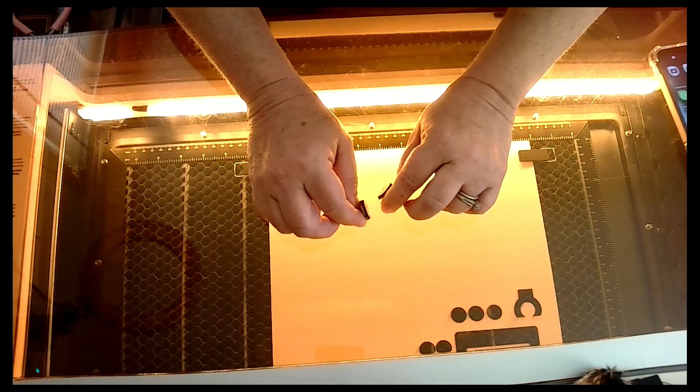Hey guys, in this video I'm going to show you how to design and create some really fun custom cufflinks for Dad for Father's Day. So we're going to be doing most all of this on the computer, so let me get to the computer

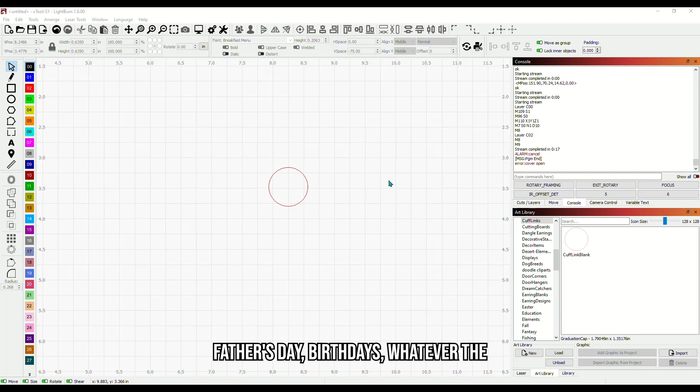and we'll get started. Okay guys, in this video we are going to be designing some fun cufflink blanks for Father's Day, birthdays, whatever the occasion. I just thought cufflinks are something a little bit different and they're super easy, so it'd be something really fun to do. All right, and I'm using LightBurn for this, and we are going to start out with a circle that is

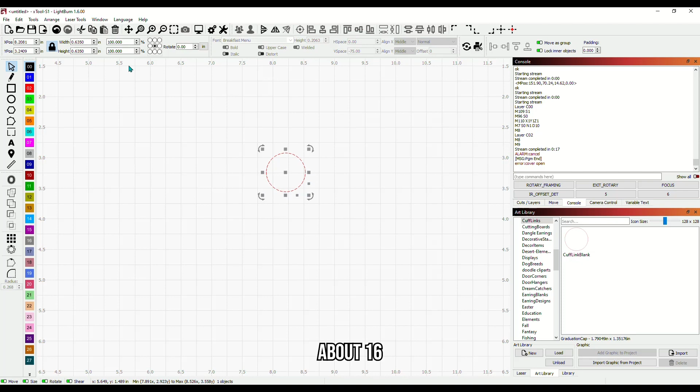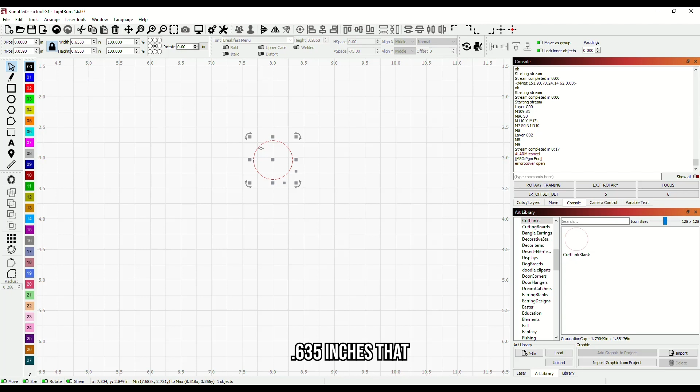0.635 inches, or about 16 millimeters, roughly, I believe it's 16.129 millimeters. I like to work in inches because that's how my brain functions, so I do inches for most things. So in this case, like I said, it's 0.635 inches. That will fit nicely in the cufflink blanks that I will link for you in the description of this video.

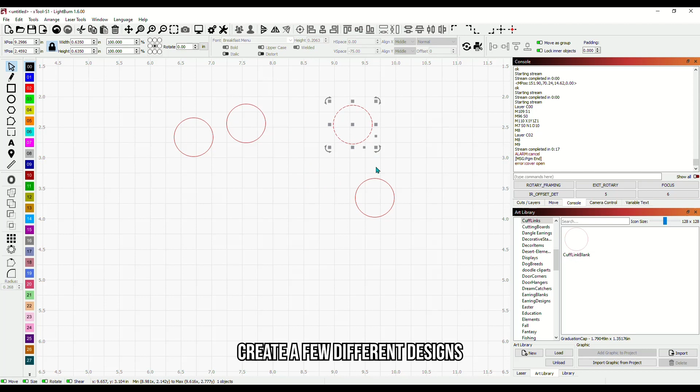Now, there's a couple different ways you can do this. You know, there's so many options. I'm going to make a couple copies of my little cufflink circle here so we can create a few different designs, and you know, you can get some ideas of what you might want to do.

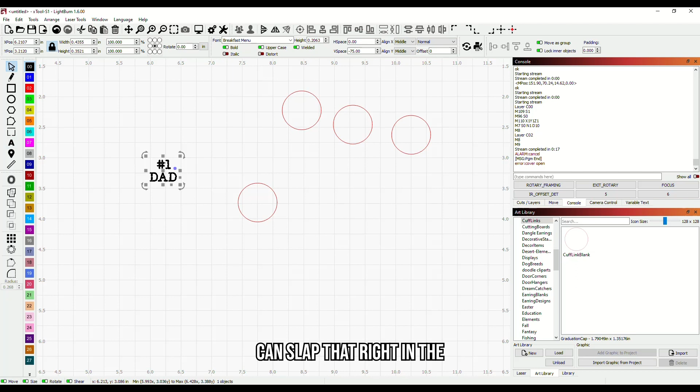Another idea is taking artwork that your child has done and tracing that and engraving that onto a cufflink. So I'm looking through here. This is my grandson's folder. He likes to draw some really odd, apparently it's from a game or something, I'm not sure, but he likes to draw these characters. So I am just going to take this little eel thing here that he drew, and

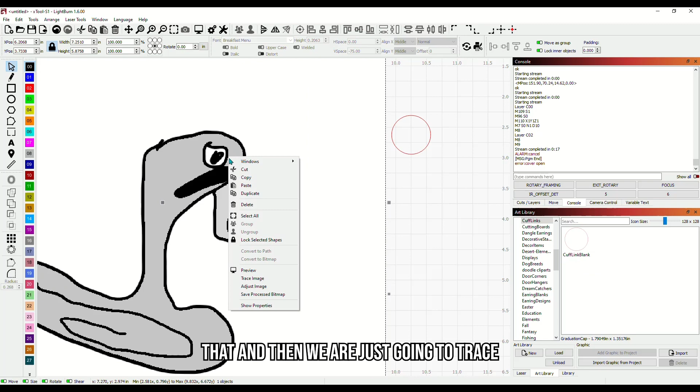I'm going to drag it into my LightBurn, minimize that, and then we are just going to trace this, fade that out, make sure the trace looks good, and click OK. Now we just have to size it down so it will fit on our cufflink. So I think that is another really fun way to make a custom cufflink file.

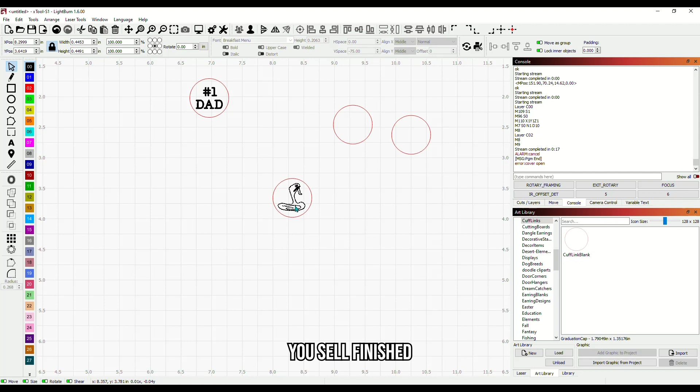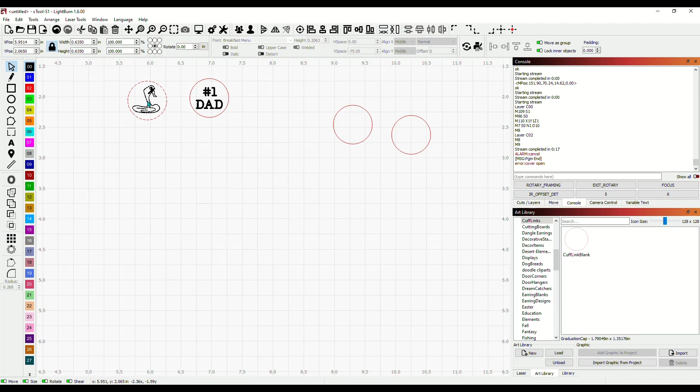You know, if you sell finished items, you could easily sell custom cufflinks to people. They send you a drawing, you can trace it and put it right on the cufflink blank and put them together and ship them out. That would be a wonderful addition to your Etsy shop.

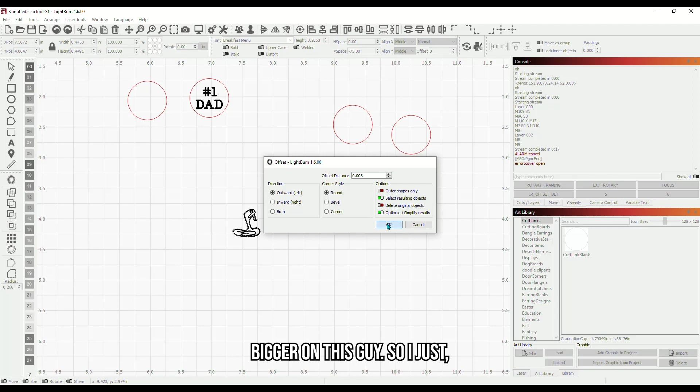I am going to make this not that big, that's for sure. I was thinking though, I think the lines should be a little bigger on this guy. So can you see the difference there? He's just a little bit thicker now. I just think that will engrave a little better. So let's move him back up in there where we had him.

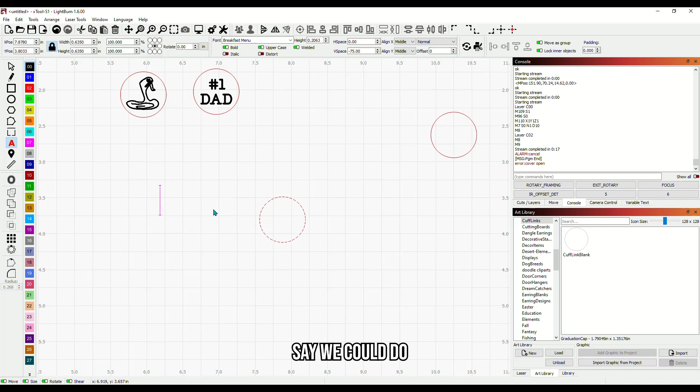All right, another great idea is just Dad's initials. Let's say we could do just, like I said, his initials, and we can make that bigger, smaller, fit that right in there. So that's another way to do personalized custom cufflinks for your shop.

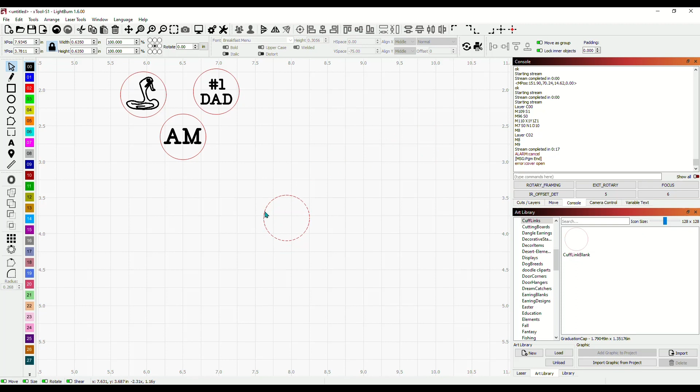Another idea is you could make sports related ones. Let's see here. Dad's a baseball nut. You could absolutely create some fun baseball themed cufflinks. Make this engraving fit almost the whole cufflink there. Center it. And there's another great idea.

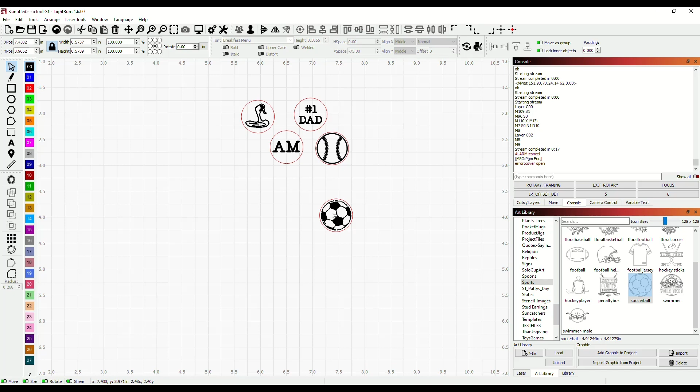All right. But you see how easy these are to design. There's, you know, an endless amount of possibilities. Here's a soccer ball. Let's do that. Dad's a soccer fan or even a player. There's another great idea.

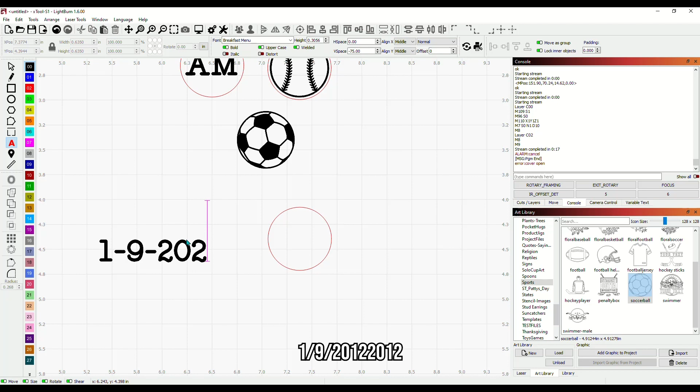You could take the initials of your child, for instance, or their birth date. Let's go with 1/9/2012. All right, and we can bring that in over here, make it a little bit smaller, and put it up here, and then grab this little purple dot, and we can actually bend this to fit inside this circle that we're drawing.

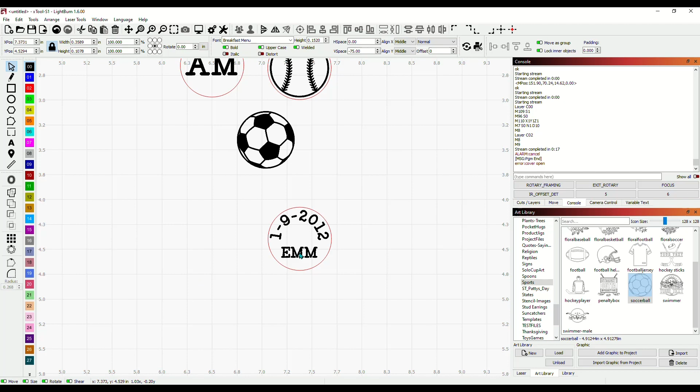There we go. Yeah, you can have a birth date there, and then you could put the child's initials inside of their birth date, and then even like a little heart or something for Dad. This is a really big heart. Let me make that way smaller. Let me zoom in here again, move it up here, make it smaller, put it in the center, and then let's turn that into an engrave instead of a cut.

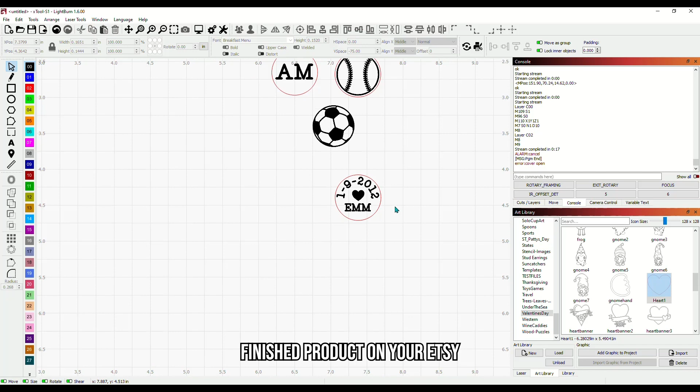So there's another idea. It'd be a really great idea to design them and, you know, sell the finished product on your Etsy shop or your website. So there are just a bunch of ways that you can create custom cufflinks and stuff for your shop that don't take much time at all.

Like I said, these with the kids' drawing is a great idea. Number One Dad, you know, that you can just type up, save as an SVG, and, you know, take a picture and slap it up in your shop. And there's not a whole lot of work involved in it at all. These are all super simple designs, and I'm just showing you how we can do it. And this is in Lightburn. I'm also going to show you how you can do it in xTool XCS software in another video.

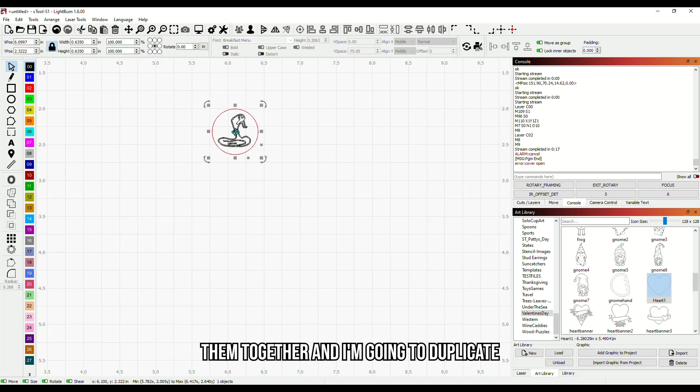So anyway, I'm not going to print out or cut all of these. I just wanted to give you an example and show you how quick and easy it is to make these. I am going to do this little drawing here, and I am going to group them together, and I'm going to duplicate it, move it over here, and then I'm going to mirror this one so that we have a pair. Then I'm going to zoom out, and let me see here.

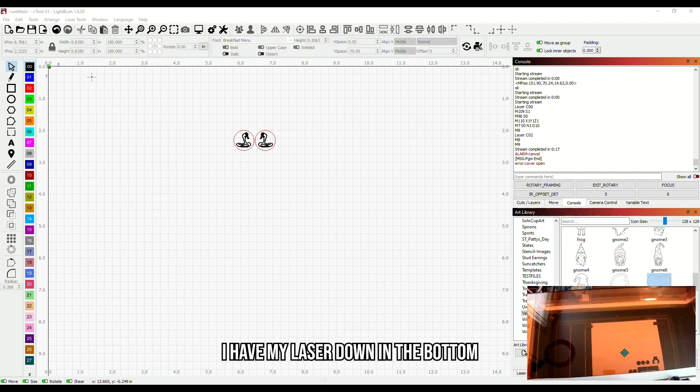Okay, there we go. I have my laser down in the bottom right, you see. Actually, I'll move that to the left. All right. I'm being lazy today, so I'm just gonna move this around a little, and I'm gonna have it frame it. Okay, and make sure it's in a good spot in my laser, and it is. So I am going to click focus here, and it will automatically make sure I am focused for the material I am using. And I am using 1/8 inch basswood right now.

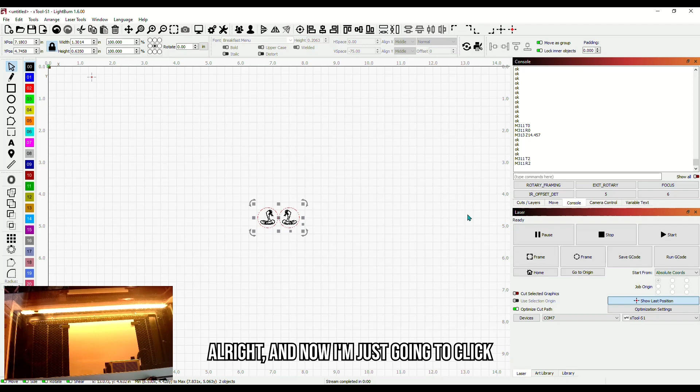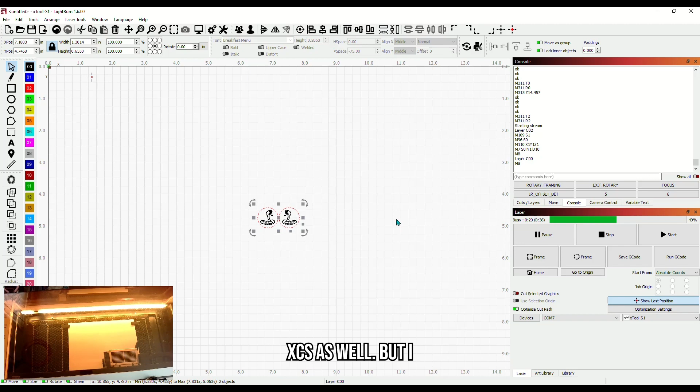All right, and now I'm just going to click start, and there it goes. So I am using Lightburn to control my xTool S1 completely. I don't have to use XCS software at all unless I want to. I will show you, like I said, how to do this in XCS as well, but I personally prefer Lightburn, so that's what I am doing first. And it is engraving right now, and they'll be done in just a second here.

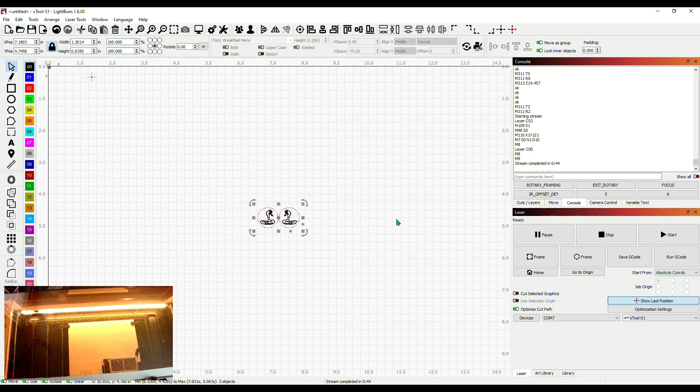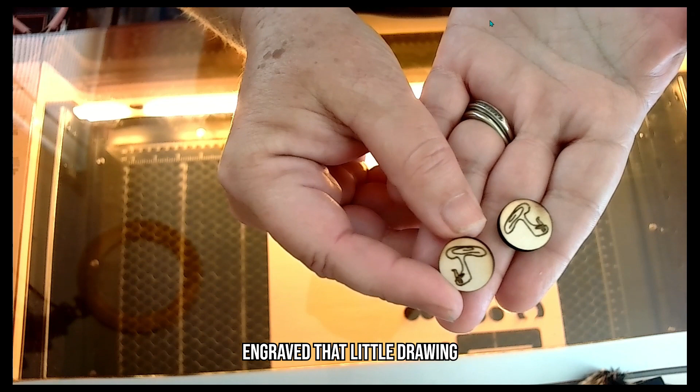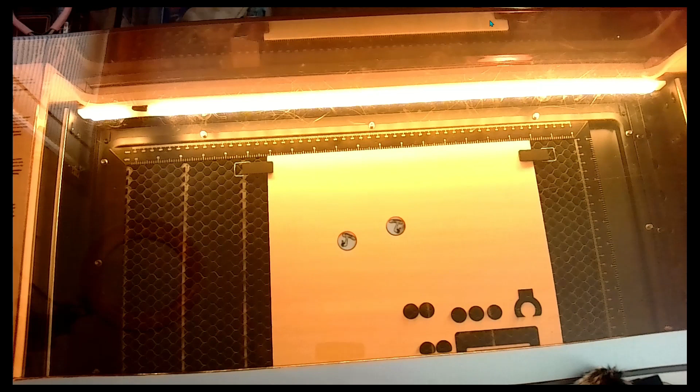Alrighty, and they're done. So let me pop them out of the laser quick and we'll have a look at them. Okay, and you can see that engraved that little drawing perfectly. Came out great. And now, like I said, all you would do now is glue them into your cufflink blanks.

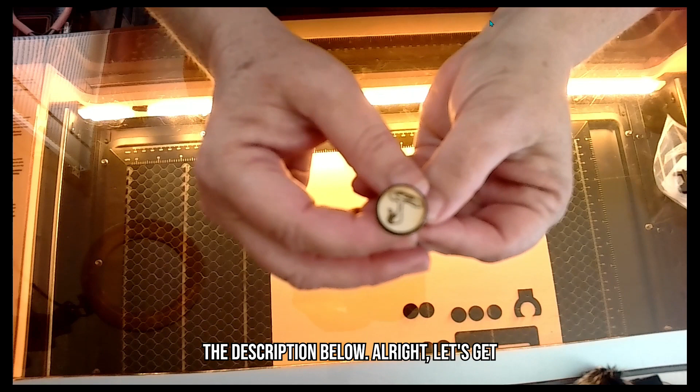All right, let's get up here. There we go. Yeah, now you can see it a lot better. Alrighty, and that's how you design custom cufflink blanks using Lightburn, and I'm using the xTool S1.